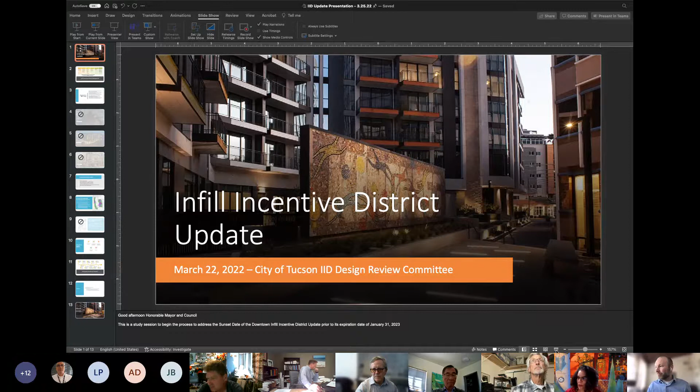Okay, oh thank you, Eric. Excellent, okay, can everyone see my screen? I can. All right, excellent. Good deal. So yeah, we wanted, so...

I'm Dan Bursuck. I am a principal planner with Planning and Development Services, City of Tucson. Appreciate everyone having me here to provide a little update for you.

So right now we are looking at doing an update to the Infill Incentive District. As you may know, there is a sunset date that was placed on the ordinance back when we last made changes to this in 2019. That sunset date, to which the ordinance would revert back to its previous state, expires on January 31st, 2023. So about 10 months or so from now.

And we wanted to provide a little update to you as we start with the public process related to looking at this ordinance, its regulations, and looking at potential updates and changes.

So this is just a little background. I know a lot of you have been involved in this, have developed utilizing it, and obviously are reviewing projects that come through with it. But this is a little background on where we've been over the last 10, 12 years or so.

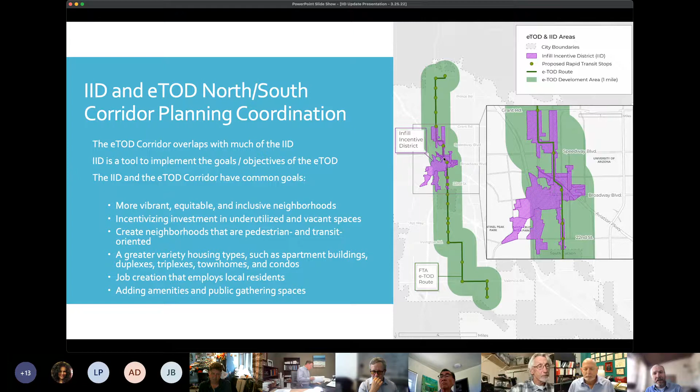So some of the policy issues and areas that we are looking at, that we see that we might need to address — and obviously we're planning to hold stakeholder meetings, public meetings, and get input from people on what you feel needs to be looked at. But these are some of the ones that we've kind of identified when we went to Mayor and Council back in February.

Looking at potential affordable housing incentives, similar to what we had done on Broadway with the Sunshine Mile overlay — looking at ways that we can provide some sort of regulatory incentive to allow for affordable housing. Looking at downtown and this post-pandemic future, and what it means to have potentially less office demand in a downtown area, and how do we account for that, or how do we potentially make changes within the Infill Incentive District to promote either conversion of that space or use of those spaces.

Potential changes to design standards, especially in the downtown links. As we know, the downtown links project will be completed pretty soon, so we're looking at seeing how that changes what we have on the ground and what we may need to do.

Changes to development and zoning standards. As we know, there's been quite a bit of development and interest in the downtown area, not so much as you start going north, a little more to the south, but especially if you go north of Speedway, that whole section of Speedway to Grant hasn't had any projects. So we're looking at some of those standards and how we make adjustments to make it more of an incentive in areas where we haven't seen interest.

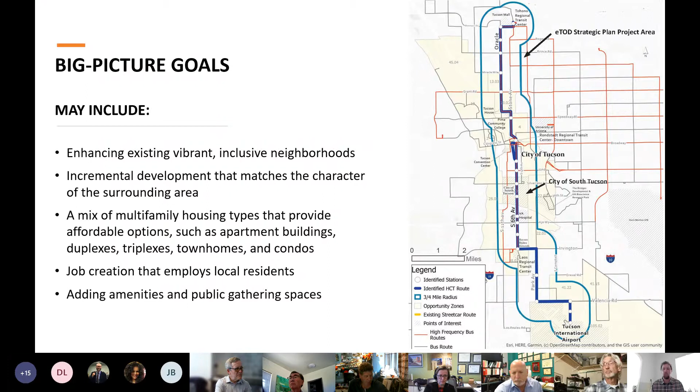Should we add more parks? Should we focus on the parks we have and enhance them? How can we create more quality public spaces that are connected to transit?

And then some more specific outcomes: looking at financial strategies, specific policies around preserving and adding mixed income housing. We've just completed a market assessment, so we know where all the vacant properties are along this corridor and within a three-quarter mile of each side of it. We're looking at areas where the city could potentially purchase land or use existing city-owned land to leverage development, or develop itself.

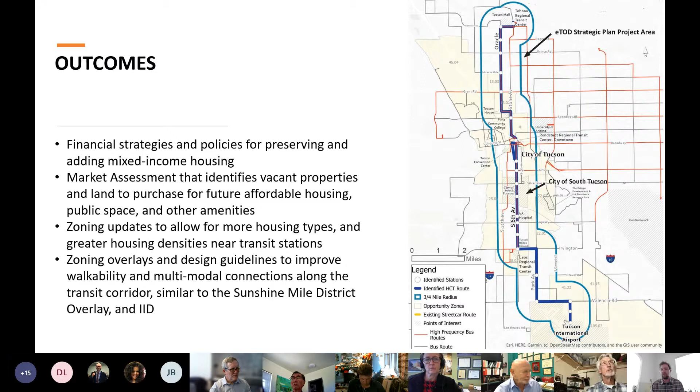Zoning updates to allow for more housing types - very similar to the incentive program we just talked about with the IID - and zoning overlays and design guidelines, also similar to Sunshine Mile and what the city is going through there.

So community engagement is really where we are right now. We actually just had three open house meetings this last weekend - one downtown at Armory Park, one on the south side at El Pueblo, and one on the north side at Limberlost. Those are just the first three meetings of many more.

We're going to have a pop-up for public outreach at Ciclovia this weekend in South Tucson, and three more rounds of outreach after that. This first round we had this weekend was really just introducing the project and getting very broad feedback - what are the places people love, what are the priorities for people in these corridors, do you want to see affordable housing, housing in general, retail, what kind of things do you want to see. We're going to dig deeper through the next several rounds of community outreach.

We're also going to have focus groups oriented around specific topics related to transit-oriented development - one may be organized around housing and neighborhoods specifically, arts and culture, transportation, public safety. Those are some of the topic ideas. We'll have community dialogues where we really dig in, not around a specific topic, but just have a very open conversation with neighborhoods about this project and get their feedback, and then pop-up events.

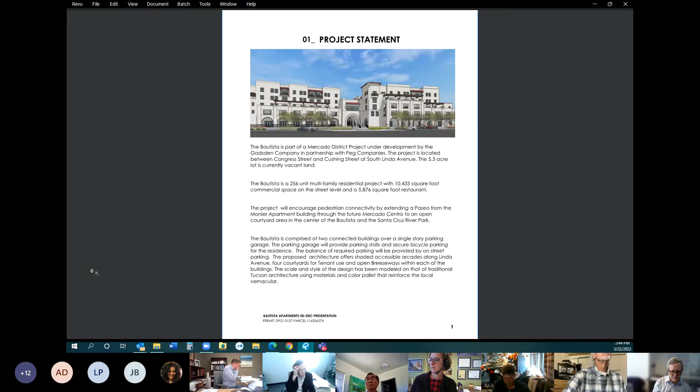So in our overview, Tom, if you could go to the next slide. The Bautista site is located between Cushing and Congress Street. It's a 5.5 acre lot, currently vacant. The project will provide 256 residential apartments, subgrade apartment parking garage, commercial spaces at street level, and a restaurant.

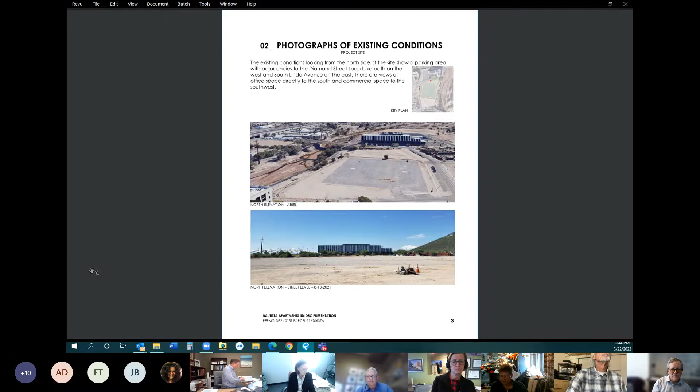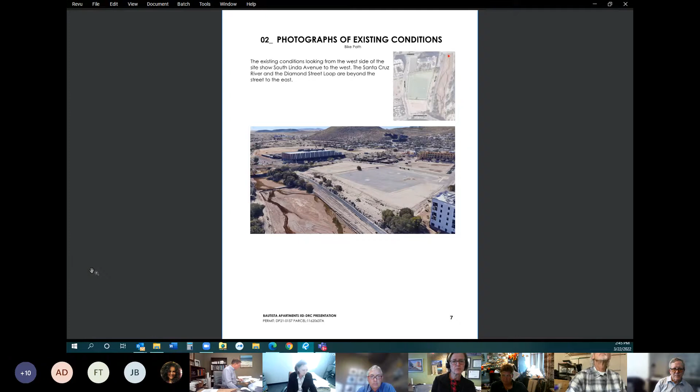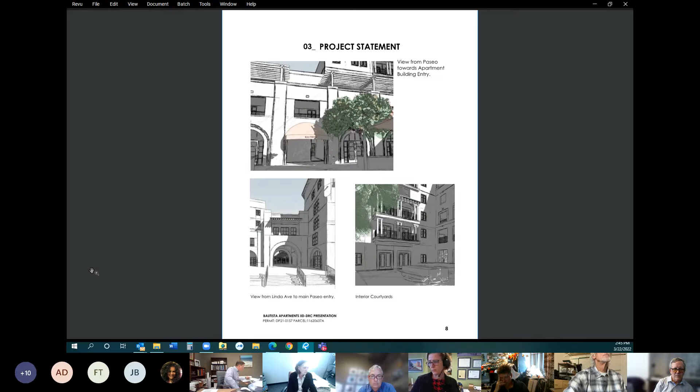The next couple of slides are really just images of the project. This first image is the entry into the residential units off of the Paseo. The second image down below is the entrance from Linda Ave into the Paseo between the two buildings. And just a quick view of one of the 4 interior courtyards in the project.

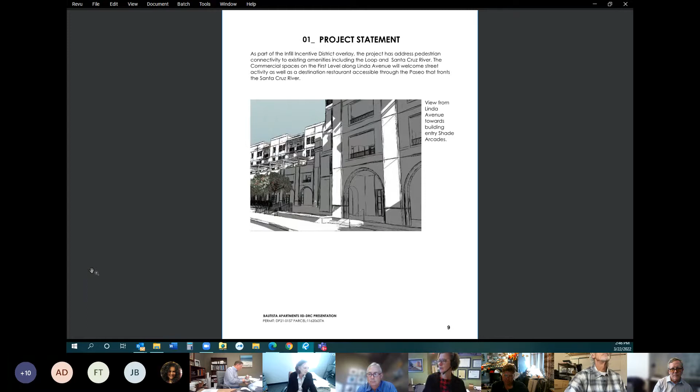The next image addresses the connectivity and the shade for the commercial spaces that front Linda Avenue. We have a continuous arcade that provides an inviting edge to the building on Linda Avenue.

One of the important aspects of the project was the connectivity and how it relates to the Mercado district. We're proposing a connection of walkways and paseos that would take you from the Mercado through the Bautista building and provide access directly to the Santa Cruz River. Gary Grizzle will expand on this when he addresses some of the landscape components.

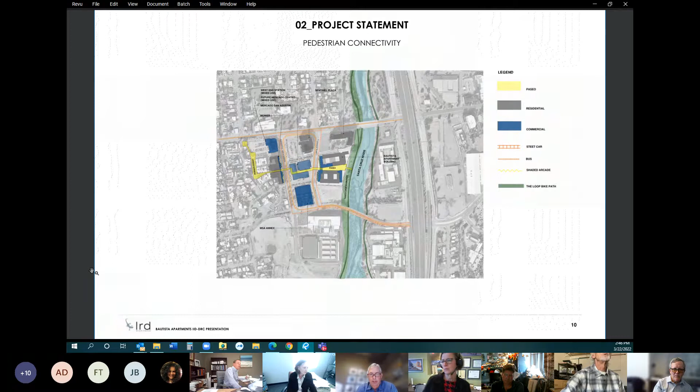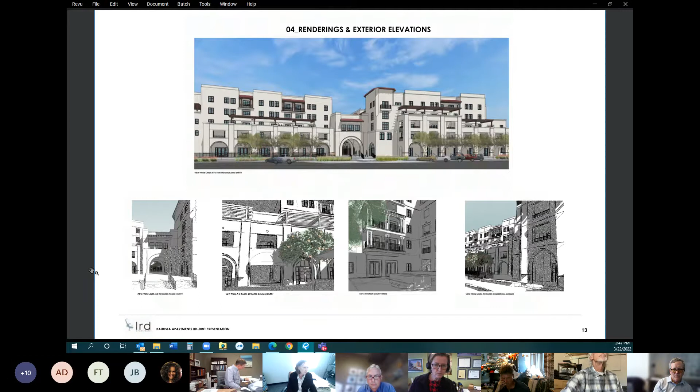Here we have rendered images: the top view is what we would see from Linda Avenue, looking directly towards the entry into the building. Below are some repeated vignettes of images inside the project, ending on the right-hand side with a view of the arcade again on Linda Avenue.

Addressing the first item on the agenda for the UDC modification, the height increase: these elevations provide documentation of compliance within the 60-foot height range, as well as components of the materiality of the building and the scale and massing over the next 2 to 3 slides.

Looking at the east elevation here, this is the elevation from the Santa Cruz River looking out towards Linda. The south elevation looks towards the entry into the parking garage. We've got the west elevation, from Linda Avenue looking at the building, and the north elevation. Again, these also show some of the materials.

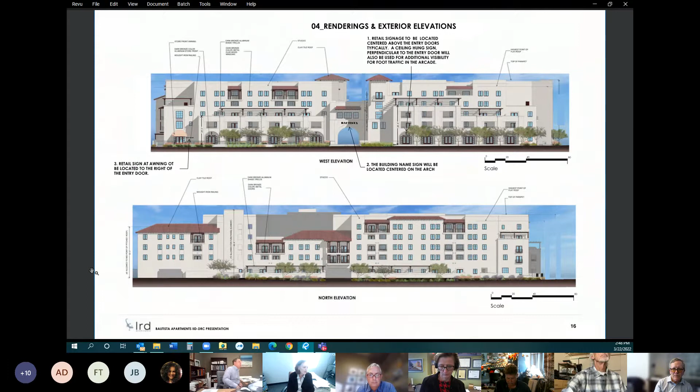We've got one more slide that will address the material palette for the building, as well as the signage for the commercial spaces and identifying the actual building. The next slide is the material palette, again trying to comply and keep with the identity that's already in the Mercado district.

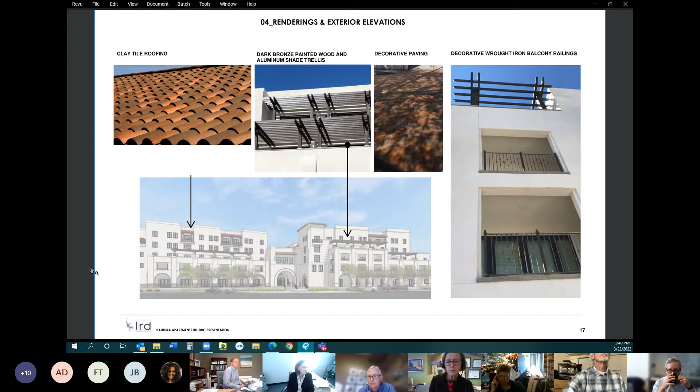I'd like to hand it over to David Little now so he can address some of the parking and other items on the agenda list.

Thanks, Gwen. The individual parking plan that we prepared essentially does a couple of different things. The total required parking for the project, largely driven by the 256 residential units, is 384 spaces. Within the IPP under review with city staff, we reduced the 384 to 377. It's a very slight reduction based on typical things you'd do a shared parking study for, like bus ridership and streetcar adjacency, which allows for up to a 20% reduction. So that's a very small amount.

What is not reduced with this IPP is the 1 space per unit required for the residential. So out of the 377 — I think it says 370 in the package, but the revised number is 377 — 256 spots will be provided on-site in the basement parking garage of the Bautista, which will provide all the residential parking, leaving 121 spots to be accommodated elsewhere.

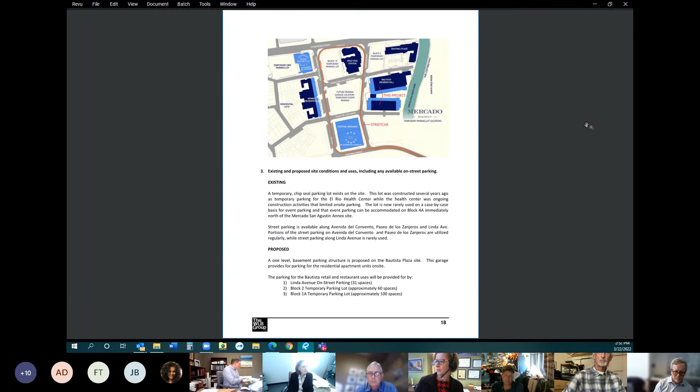For bike parking, there's 199 long-term bike spots required. We're providing 68 in the garage, plus additional spots within the units for the long-term secured bike storage.

For short-term, the only thing we're asking for through the IID process is we've got 46 short-term loops required, and we're providing 50. We're asking that those short-term loops be dispersed in places that make sense on the interior plazas and the front streetscape, so they're built into the environment we're trying to create, as opposed to just being a sea of bike parking right by the door. The plaza and streetscape areas become extensions of the interior spaces. On the screen you can see some of the bike loops we're providing on the plan - we're not asking for a reduction, actually we have a few more than code requires. It's just to space them out and make them fit with the plaza design.

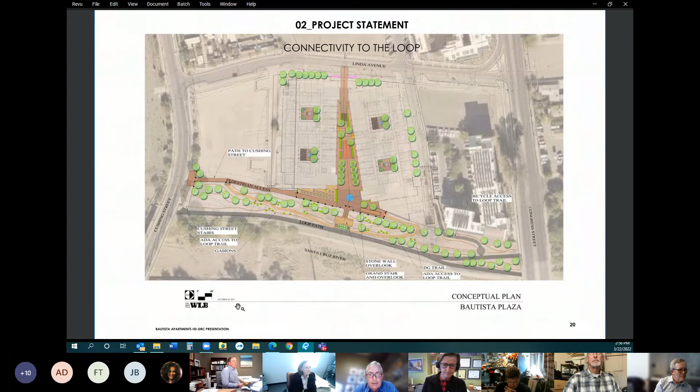So for one of the last things - if you go to the next slide, you can see this one's angled, turned 90 degrees, so you can see the strong central plaza as it courses through. One of the things for the residents is we're providing 4 courtyards, which you'll see in the interior of the buildings. These will be for the residents, and a great place for social events or simply relaxing.

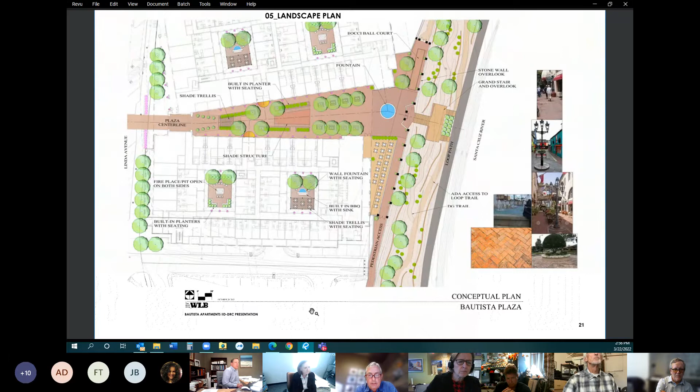I think the only thing I would add, Gary, is that we've had a lot of conversations with the Pima County Flood Control District, and they bought into our concept. One of the things they want us to be very aware of is to keep the overbank flow area open for flood control reasons. This respects that, and the Flood Control District understands that we will have to put together an agreement with them for the various encroachments, maintenance, and responsibilities of what we're doing out there in the river park. So we're on board with that.

Moving on to item D on the screen, part of our application is some alternatives for trash collection.

What we're proposing interior to the buildings is 4 trash rooms totally interior to the buildings. You can see them as the hatched areas on the plan. On trash day, those bins will be rolled out to the street, similar to other areas of Mercado, particularly the Monier building, where they're rolled out for pickup day. So that's the 4 on the 4 corners of the building, those interior trash rooms with the path delineated out to the street for pickup day.

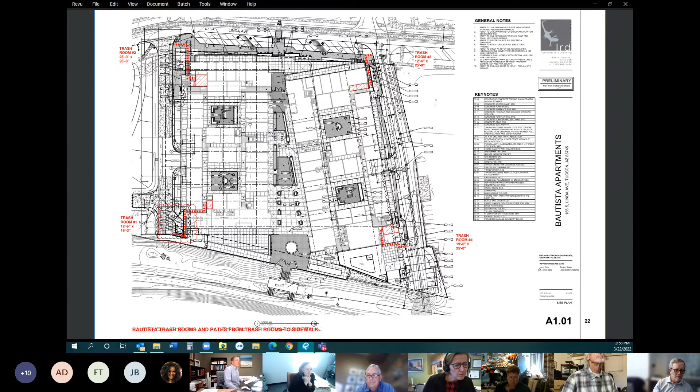The addition is on the bottom left of the screen. There's a lot going on there on this graphic, but there is a separate dumpster area, and that dumpster area is for the future restaurant. Could you zoom in on that, Tom? Yeah, thank you.

That's better. So you can see the dumpster area there, it's accessed off of the PAL we provided on the south side of the building, with the turnaround area both for fire and for pickup of trash. One of the things we've added, going back and forth with Environmental Services and Andy Vera, is the recycling aspect to the commercial dumpster, and those are the 4 bins shown on the enclosure. They would be rolled out through the man door out to the street area.

I think Andy is on board with what we're doing with that change, and what he's asked is that we make sure all of this is shown on the final version of the development package, in particular hatching in areas where the bins will be wheeled out to the street, so that they're not blocking sidewalks and that kind of thing. So we will definitely add that to the final version of the development package. But I think that's all I've got, Gwen.

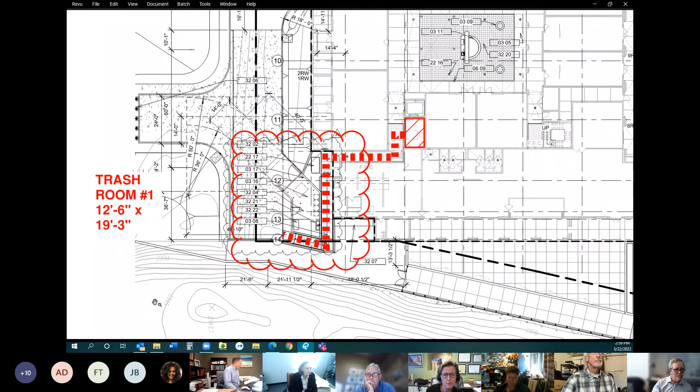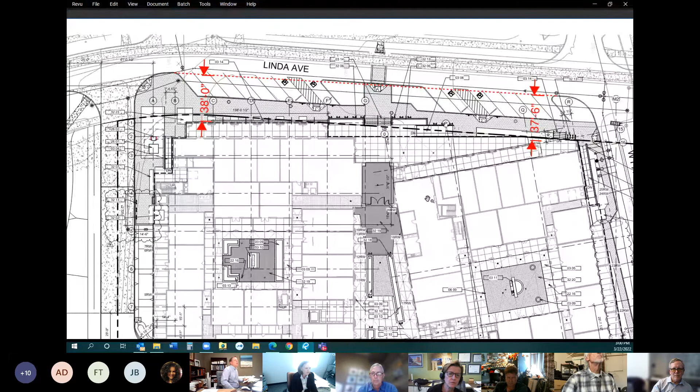Then I think the last item was item E on the agenda, which was the perimeter yard setback from Linda Ave. 38 feet was what was required, and we're slightly short of it on the northeast corner of the building. So this is just documenting that and requesting that we could get that encroachment modification. And that is it for our presentation.

Thank you. Thank you.

If there are no questions, well, yes. Mr. Chair, I think the design professional is ready to make his statements. Okay, Faye. Hi, everybody. Hi.

Yeah, to me this is a very fine project, and we didn't have too many issues. We went back and forth a little bit on some things just to get clarity mostly. The height seems to work for me, and even with the encroachment that Glenn just talked about, that looks fine to me as well. I think for the materials, we have some colors and some more explanation of what that is, but...

We may need a little more detail on it. Like if you could put it on a board or something so that we can actually see what materials you can use, that would work a little bit better. But that can come later if you need to do it.

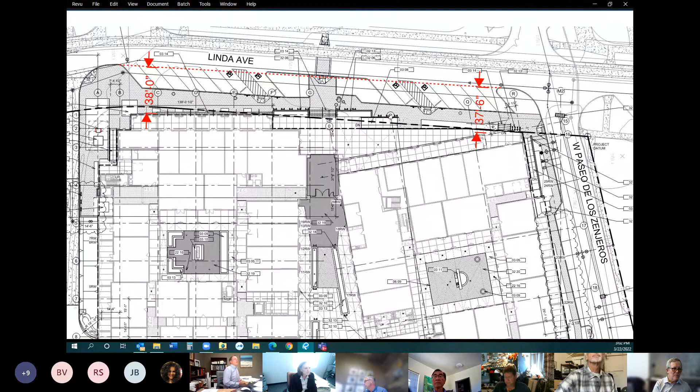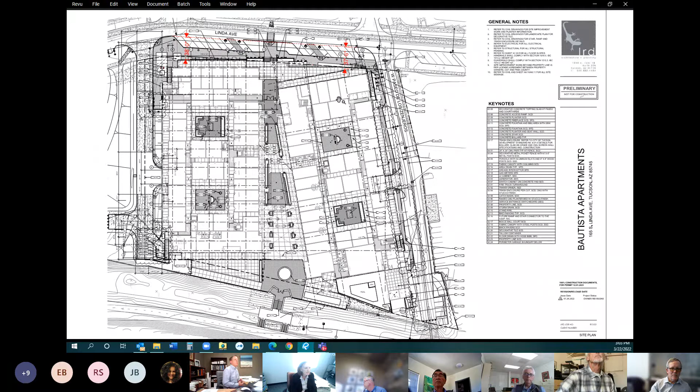So that's that. And then in terms of the ADA parking, the ADA spots for the residential units themselves are in the garage beneath it, next to the appropriate elevator locations. The ADA parking for the restaurant is provided on Linda Avenue out front. So there's, I think, a total of 3 spots for the commercial, retail and restaurant items that need to be accomplished, and that's provided for on Linda Avenue out front.

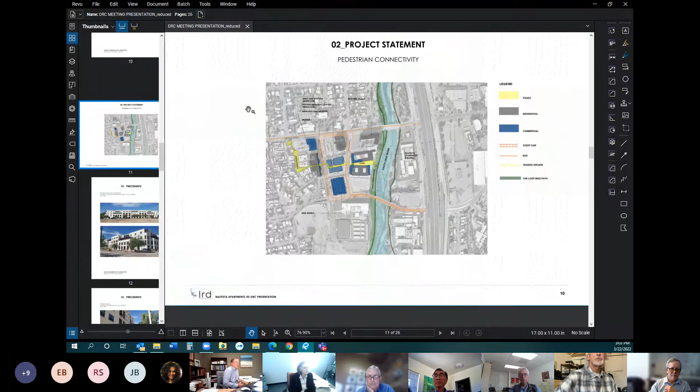This is Bill. I have a question. Could you indicate on the site plan where the commercial activity will be located? And my second thing is where is the bicycle parking in relation to the loop?

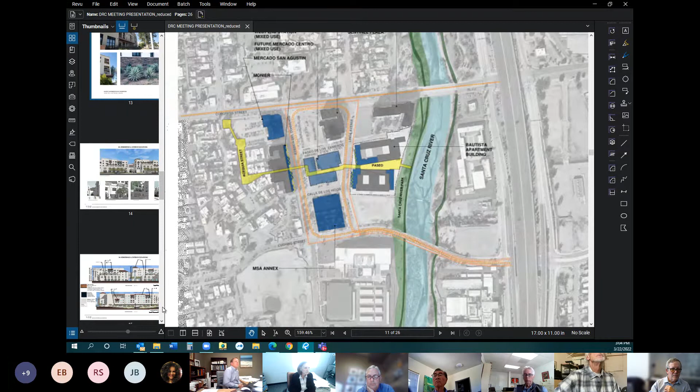I can address the first question. The commercial activity is primarily along Linda Avenue, behind a pedestrian arcade, so all on the upper portion of the site, these are all commercial spaces. There's also going to be a live-work component on the Paseo side, so a lot of these units have been dedicated to live-work units, accessible directly from the Paseo.

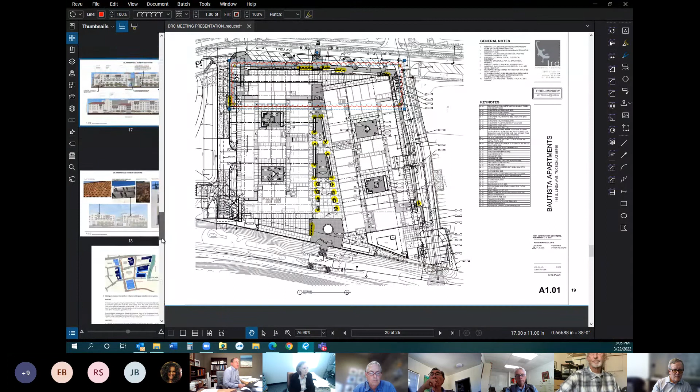But yeah, the bike parking loops are pretty well dispersed throughout the site.

How large is the restaurant space? It's just over 10, let me double check what my numbers are here. It's about 5,800 square feet. Thanks, Tom.

That's the restaurant that I just circled with the bubbles. And this is the retail up here. Thank you.

How many bedrooms in the complex? Sorry, I didn't quite catch that. How many bedrooms in the 256 units total? I don't have that at the top of my head right now, but I can get it to you.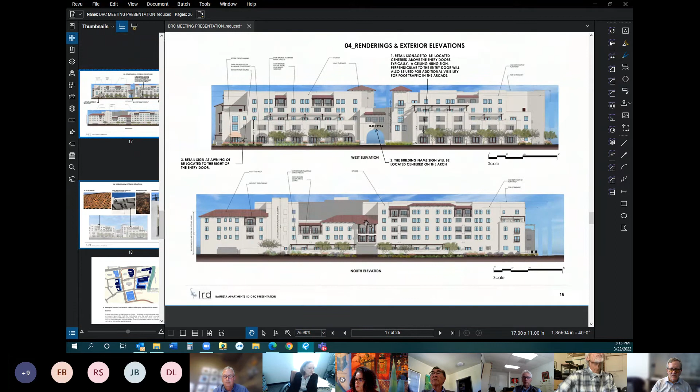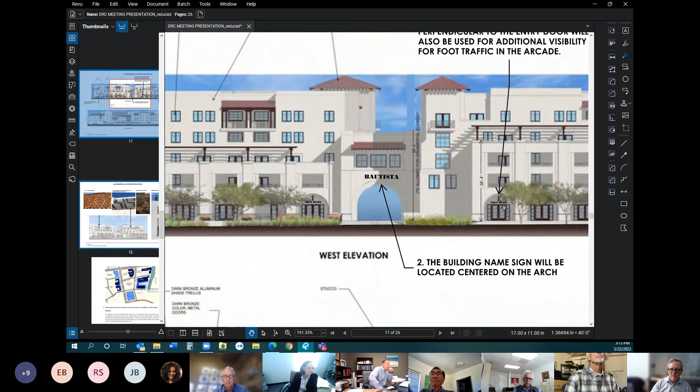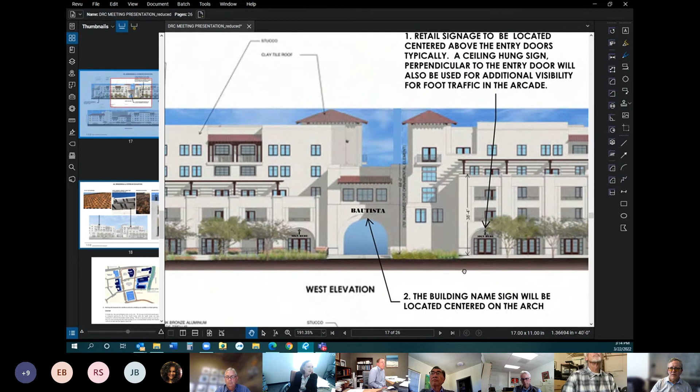Actually, we can have a quick look at it now. What I did include, based on your previous comments, was a general location for the building signage, as well as each of the commercial spaces would have a sign over the entranceway, as well as a decorative light fixture, and a sign attached to the building itself, so that pedestrians walking parallel to the building could see the signage. Okay, thank you.

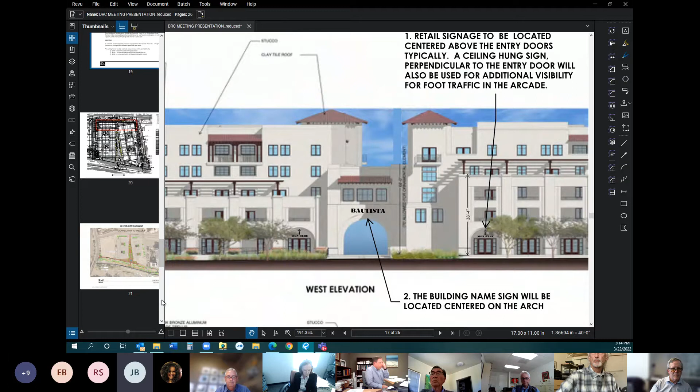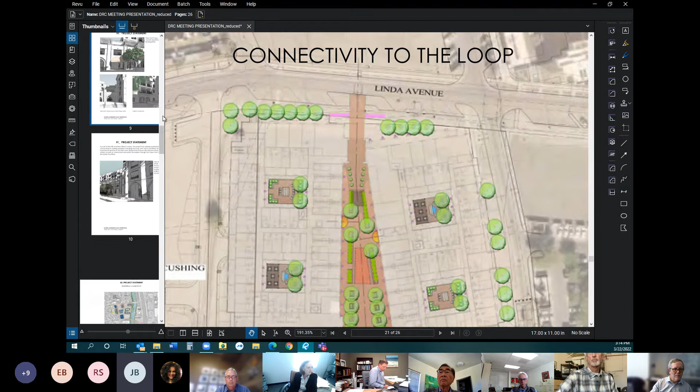And then one other question I had about the parking. I'm glad that it is 1-to-1 per unit, although the number of bedrooms suggests there may be further requirements in the area, depending. The parking spaces that are allocated to temporary spaces now will be further developed in a proposed garage or series of garages that the design team has suggested will maintain connectivity in the future. Will those 160 spaces that are in the current IPP be transferred as an obligation for that other property in the future when it's developed, or will they not transfer?

My question stems from a non-tracking of IPPs. In my experience, spaces are now being allocated for 4 or 5 projects or more along certain street faces in various development zones around the downtown area. So once everything is all built at once, I'm not so sure that parking requirements will be met.

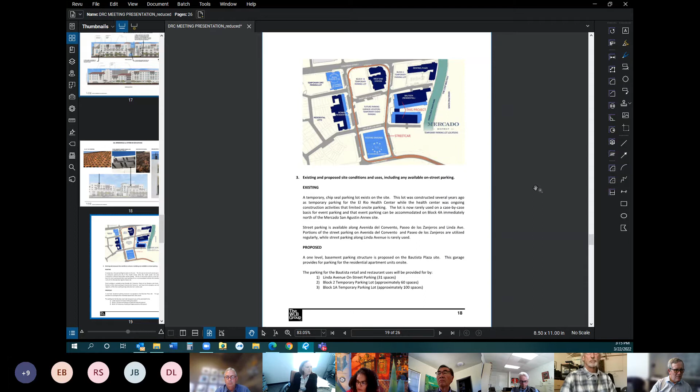Mr. Burr, Mr. Chair, we have with us Mark Castro from PDSD. He's leading the IPP review effort. Mark, can you please kick in? Yes, thank you, Maria. This is Mark Castro, Mr. Chair, Mr. Burr, and members of the DRC. So what we can do with the IPP, and I understand Mr. Burr's comments, and that's a good point.

We can do a condition with the IPP that ties the development to a more permanent parking facility. And actually, in conversation with the Park Tucson administrator, we would recommend a condition that one of the temporary parking lots become more of a permanent parking lot.

In other words, it gets a DP approval. And that way we do have parking spaces allocated as a permanent parking facility. And then, should the project move forward with the development of the parking garage, those parking spaces go away and transfer over to the new parking garage. So that's kind of where we're going with the IPP, and our recommendation that I've been coordinating with Park Tucson.

So the condition you're requesting we add is that the off-site parking be conditioned upon inclusion and future review of structured parking in the area? Mr. Burr, Mr. Chair, members of the DRC, we would actually have that condition go with the IPP. It wouldn't be with this meeting.

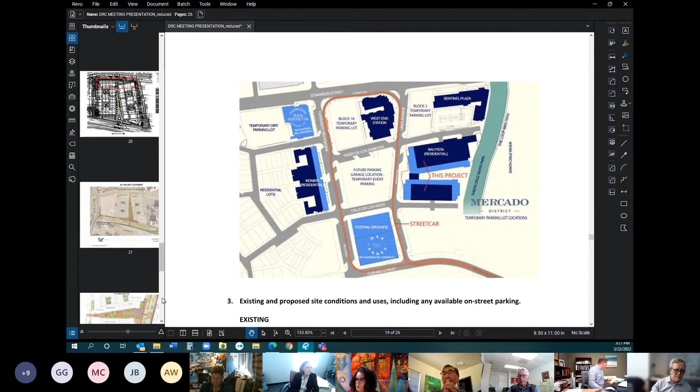Mr. Chair, were you asking for a motion? I am asking for a motion. I can make the motion that we approve the project as presented with two conditions: one related to the design professional having the opportunity to review the materiality of the project as previously noted, and that the condition described related to the IPP be included. I need a little help with the language of that, but those were the two conditions I heard.

I think that's just that the temporary parking lots, the off-site parking, will be tied to future parking development structures. Thank you, John. And should we also add that if there are any further major changes, it should come back for review? I'd accept that as a third condition, correct?

Okay, I'll second. Okay, we'll take a vote. All in favor? Aye. Aye. Aye. Opposed?